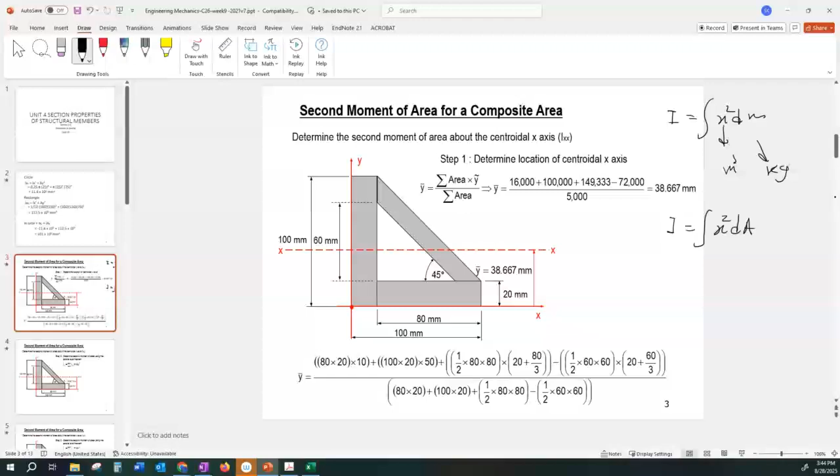So for this one, we can start breaking that into a number of shapes. For example, we do propose how to break it out in this problem. But before that, let's see how different scenarios can work for you.

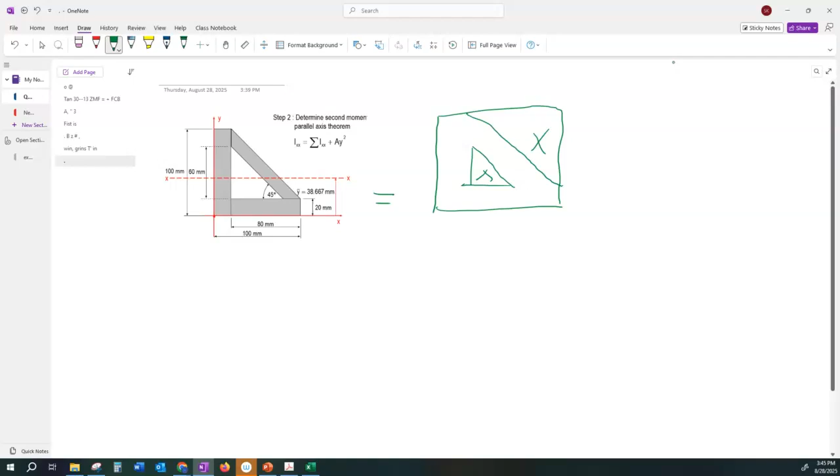So one scenario is if I make a big rectangle to start, this is equal to that one. Then from here, I draw a line and cut that part, and I end up with this one. Then let's subtract another triangle from it. That's one scenario, but the way we did it here is slightly different.

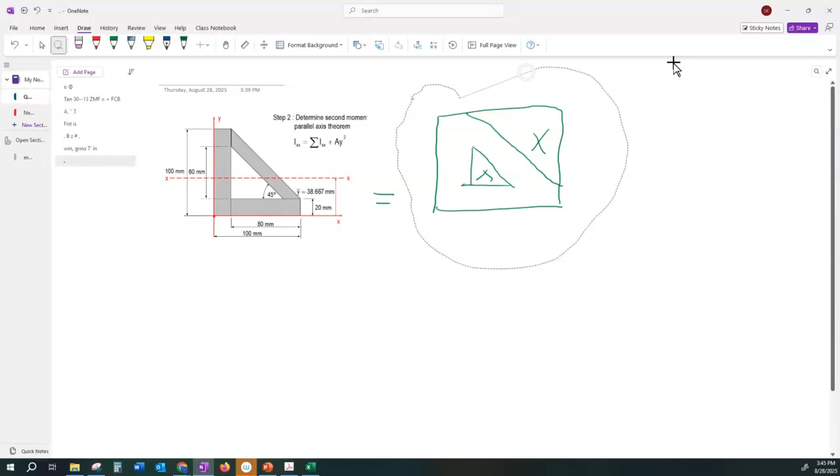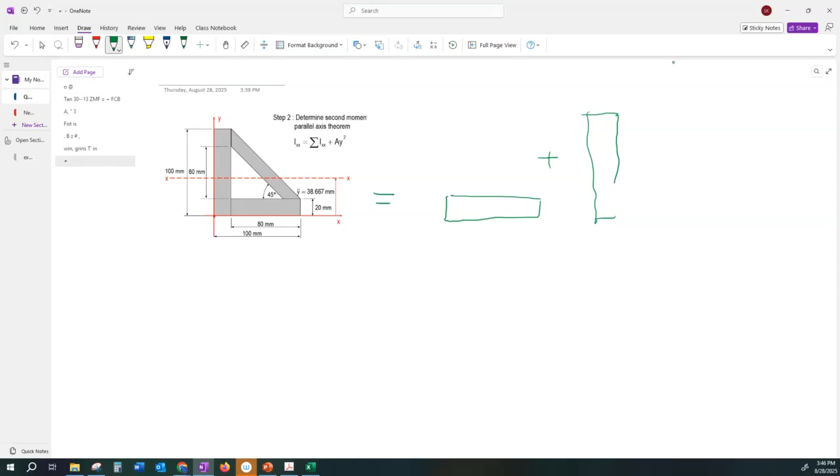So I'm not sure which one is smarter. With this problem, I don't have any preference. So here we start with a horizontal rectangle plus a vertical rectangle plus a big triangle, and then minus a little triangle.

All right, so this is not very perfect, and I'm not sure if we could perfect it more. But one thing I want you to notice is for the real beam, which is on the left-hand side, there is a reference, shown by the dotted line. The physical meaning of that dotted line is that if you start to bend the beam about that line, the upper and lower portions behave differently.

Anything above would be in tension, the bottom compression, or vice versa. Therefore, this is your reference, and that reference is the first thing you calculate. We call it Y bar. And then we want to bring the right-hand side, everything, these are primitive shapes.

Just a question: is it okay if I bring the standard value from the table, from the formula sheet, and add them together? For example, for this one, that is 1/12 B H cubed, that's what I get from the table. Can I just use it? I mean, I can, but I have to pay a penalty, right?

The penalty is with respect to this datum. This is my datum, here, that's where the centroid is. So if you are bending this one, you would have assumed that it's going to bend with the reference over there, but in reality the reference is here. So how much difference is here?

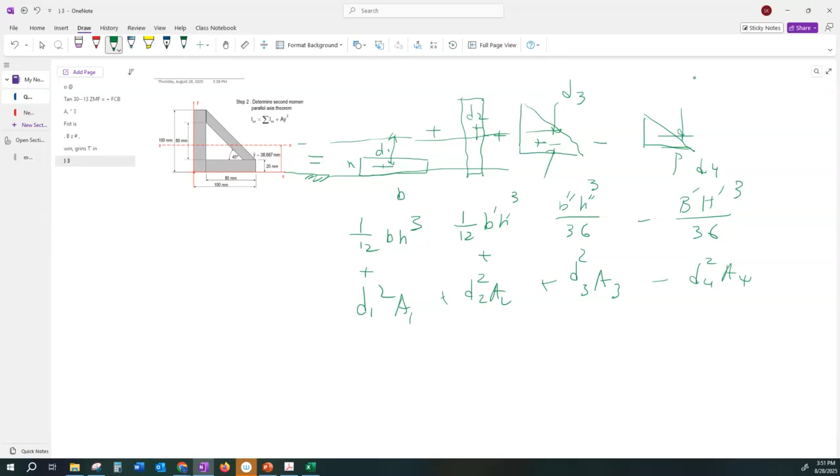Yes, so this is how we do it, but what is the first step here? The first step, when you are given the composite shape, is to find the reference, that dotted line. So how do we do that? This is also suitable for tabular method, because what you do is you say y bar is equal to...

a1 y bar 1 plus a2 y bar 2 plus a3 y bar 3, and then take a note here, I don't add a plus, I'm adding minus a4 y bar 4. And in the denominator, you put a1 plus a2 plus a3 minus a4. So don't be, this is not a universal formula. You have to take into account the plus minus sign.

Okay, so that is the big picture. Now we go to the number crunching for that problem. And once we did that, anything else we do, even that is very suitable for what we call tabular method. What is tabular method? You write formulas in Excel in a table, and then underneath the table you easily can sum the number. If you have to multiply terms and add them together, it's very flexible for that kind of thing, and that's what we will be doing next.

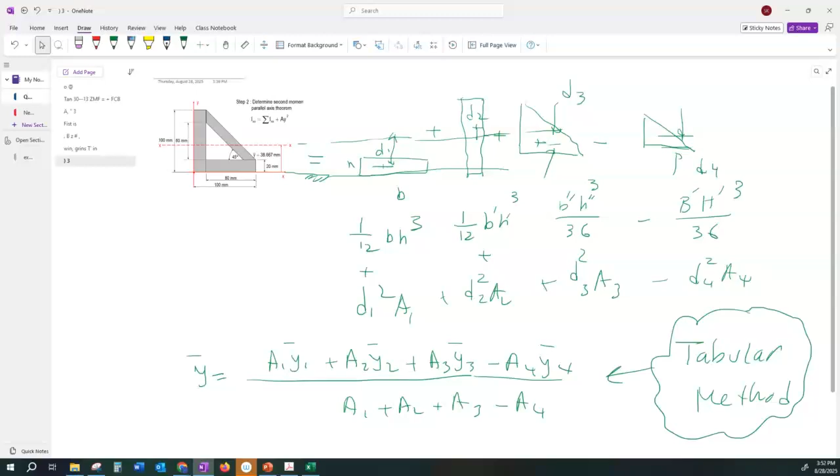So let's have a fast forward of how these things are being done. First of all, that formula is not correct. So here you should have a parenthesis. The sigma applies to everything. And here you put a bar. That bar means what you get from the table.

And that is, well, here they call this y squared, they call this d squared. They're the same thing. So this, you could write this as summation of I bar, this is from the table, or standard I, plus d squared a, I from 1 to n, however many shapes you have. And that summation could be sum, could be subtraction.

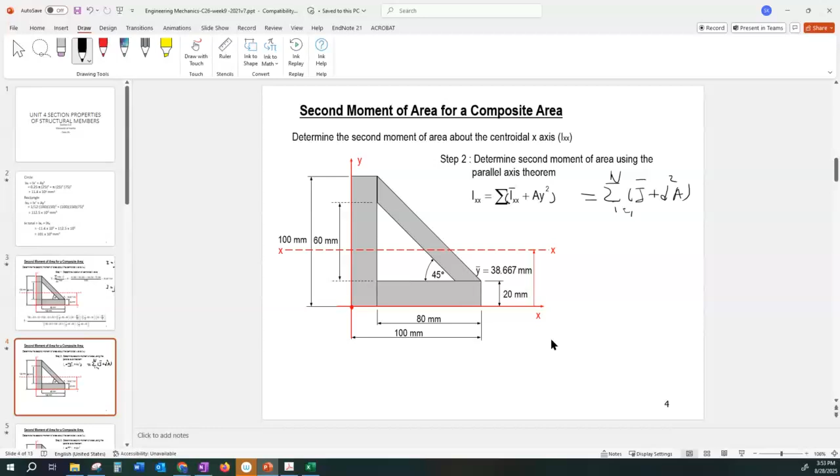All right, so let's get this one started. First shape. All right, we found the reference to be 38. Anyone has a problem how to find it? That was the formula I gave you. If you put the numbers in it based on the division, this is shape number 1, this is shape number 2, shape number 3, and shape number 4.

So 3 is here, 4 is here. Three is just a bigger triangle. 3 is the bigger triangle, and 4 is a little triangle. So basically, if you were to fill in where 4 is, that's one triangle. That's 3, it's one giant triangle. Basically with a whole bunch of the rows. 3 is the whole structure. Correct, that's the external part. Yeah, okay. All right.

Now, let's do this once for the yellow, which is number 1. Anyone can tell me where is the centroid of yellow? The centroid of yellow with respect to the bottom or datum. This is the datum, right? So the centroid of that is here, isn't it? That's 10. So if you want D1, that is D1, isn't it? So D1 is equal to what?

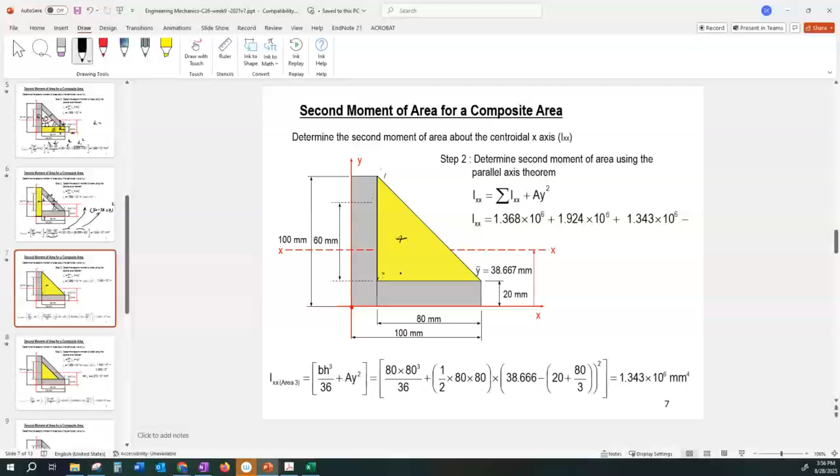Now take this, this is the third shape. And with the third shape, careful where the centroid is. The centroid is 1/3 of the base. So if this one is 80, the centroid is located at 80 by... I just exaggerate to make this readable, so that is 80 divided by 3. So if the total is 80, this is 80 by 3.

And then you have to add another 20 to it, so 20 added to 80 by 3. That is how far you are from the datum. From the baseline. This is the baseline, you have to measure. Y bar was measured from the baseline, so your centroid should also be measured from the baseline. And then that is the gap you are looking for. That is D3, this is the D3.

And that should be multiplied by... well, no, not D3. D3 is here, D3 is this one. And that is the area of the triangle. That's a standard value. For triangle, the formula is not BH by 12, that's BH cubed by 36.

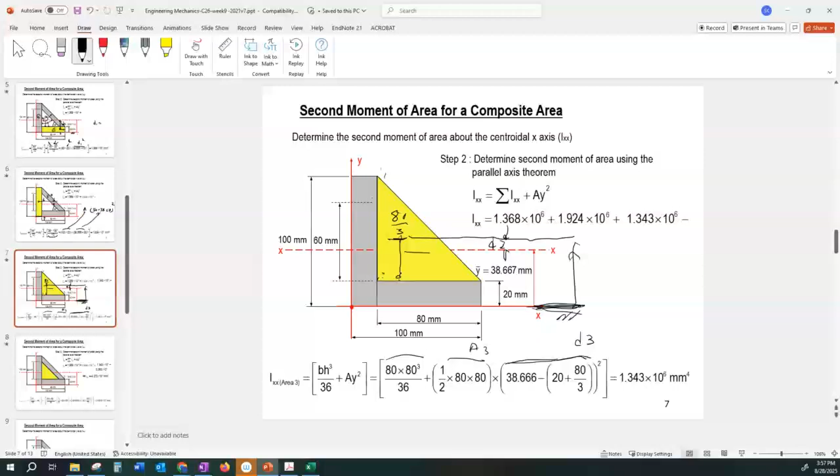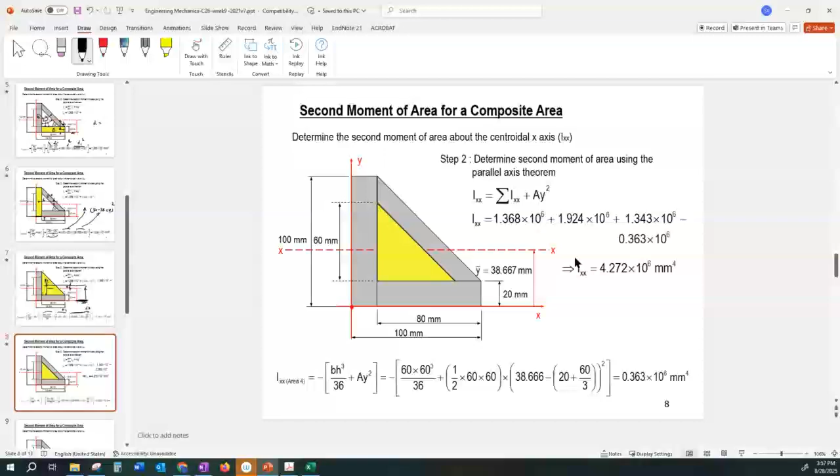All right, now eventually you do that for the little triangle. But little triangle, keep in mind, it should be subtracted from the previous values. And eventually you have all these things calculated all together.

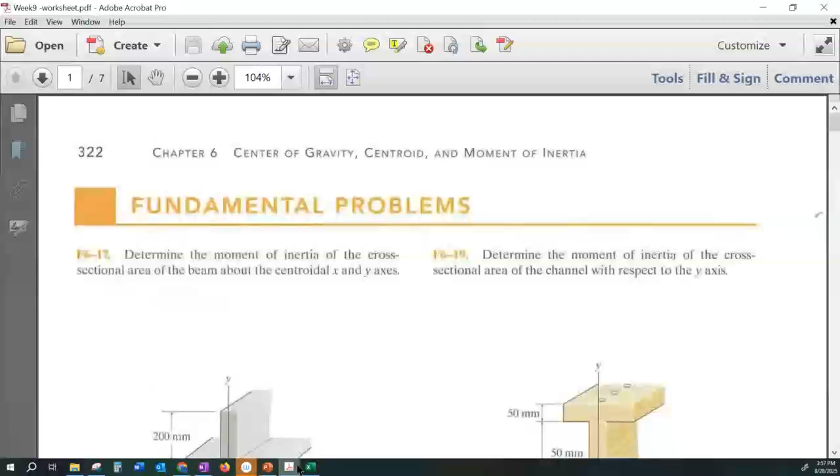Now let's go to page 322. And the question we have is number 18. Let's see what number 18 is. This one.

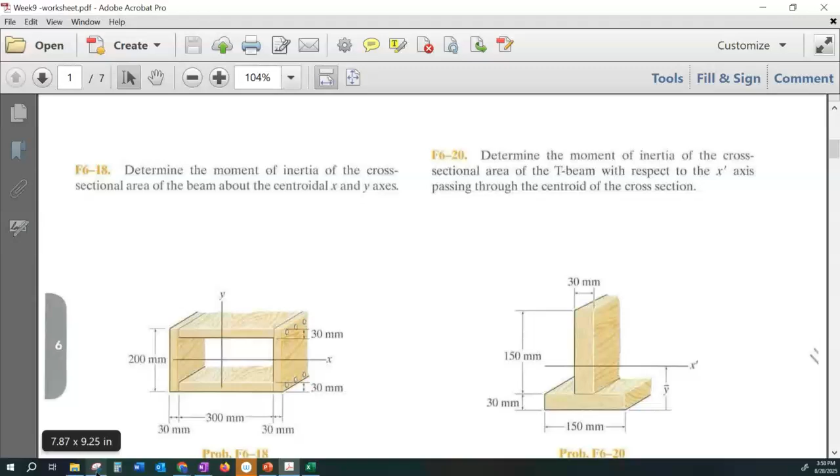2 minutes. Who can propose the smartest decomposition? Would it just be one big box minus one small box? Why that is smart? I mean, everyone listened to what Taha said. Look, we could have done it differently. Let me do that in both ways. You see the difference, okay?

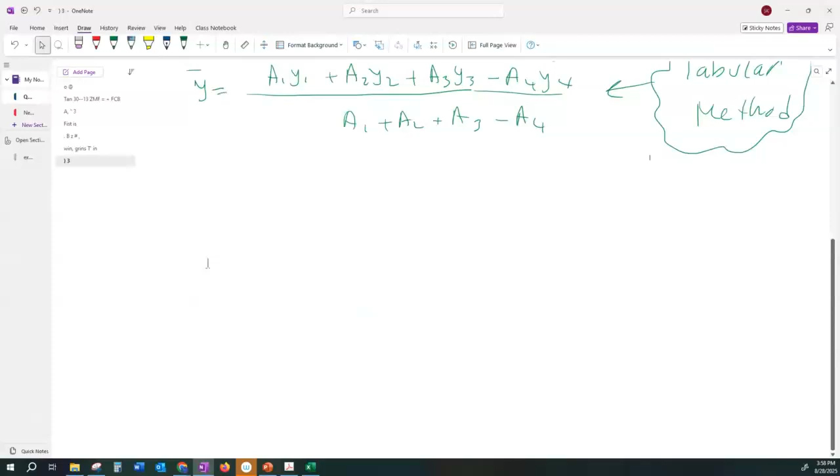So what he is saying is he is proposing this shape, this cross section, is equal to that rectangle minus this rectangle. Why is this so smart? Because the centroid of this one is right in the middle, isn't it? If you extend, this one has the same centroid, this one has the same centroid, so you don't have to pay any penalty for it.

I mean, someone could do 2 times a vertical wall plus 2 times a horizontal line. Okay, but at least for this one, you have to go and find an offset, you have to calculate the penalty. But eventually, you get the same number. This is just a matter of convenience, the matter of don't do something which is not needed.

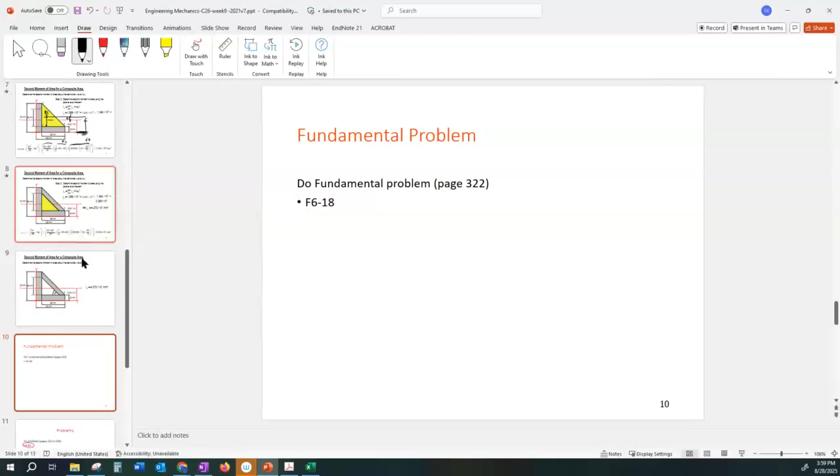Let's go to page 322. Okay, here we want to calculate I for here. And this is a 2-part question. First, it wants you to find I with respect to the x-axis. The other one asks you to apply one with I with respect to y-axis.

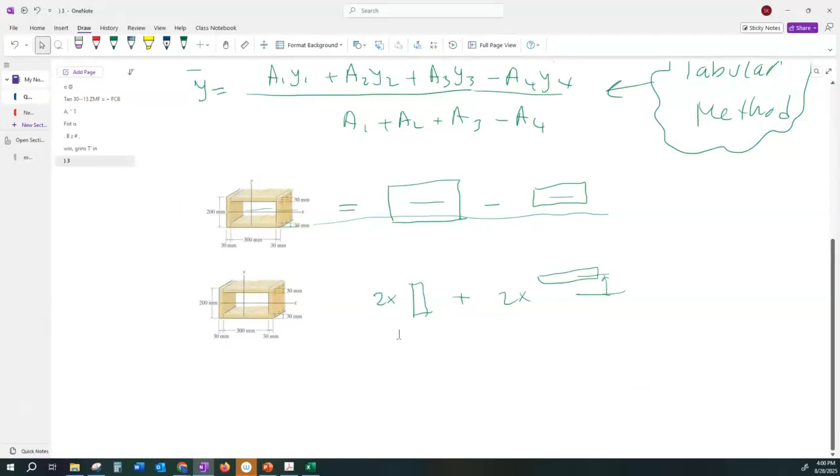So what is the difference? The difference is with this very same beam, if I apply my load like so, the bending takes place like so, right? So it is about that axis. But very same beam, in this case, load is Py, your I is Ixx. But if I apply P in that direction, this is Px, then you have to calculate Iyy.

So load normal to the reference plane of the bending, all right, just memorize it. And in some problem, tricky problem, they just flip the shape, and students are used to taking the horizontal line as the x-axis, but then for that they have to use I for the vertical axis. If that makes sense to you.

So is I the centroid of the whole shape? I is not the centroid of the shape. I is a geometrical property which is directly proportional to the performance. The larger the I, the better performance. Mathematically, I...

Iyy, that is I with respect to the y-axis, that is x squared dA, but Ixx, that is y squared dA. So that's mathematical, kind of difficult to interpret, but the interpretation is: if you throw that dA farther from the neutral plane, the larger the number. This is like when we had an I-beam, we try to stretch that, to make the area farther from the neutral plane.

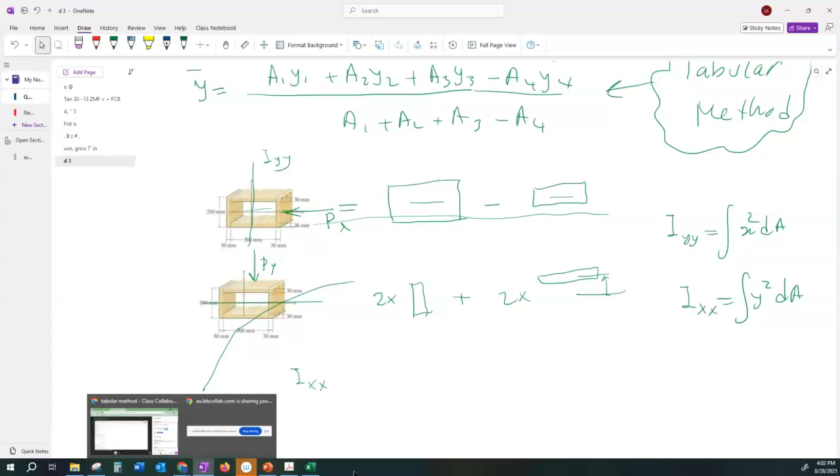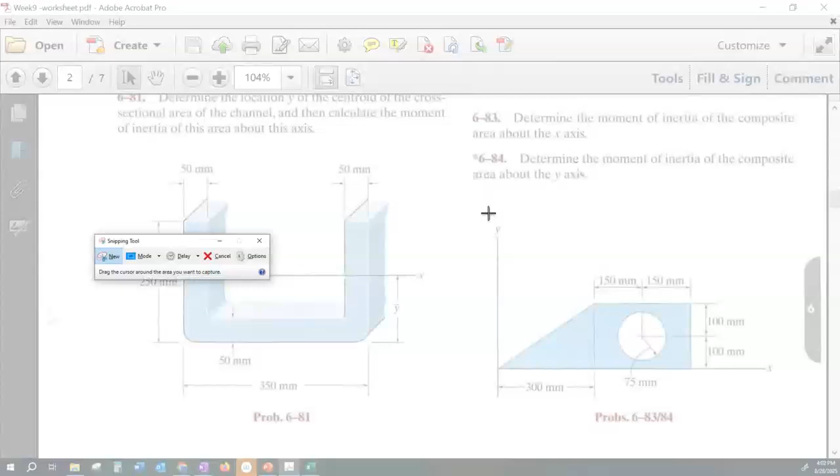Let's do something which has some tough number crunching, something like this one. Okay, for the first part, you want Ixx. Let's try together. And with that, I think we could start the tabular method with Excel.

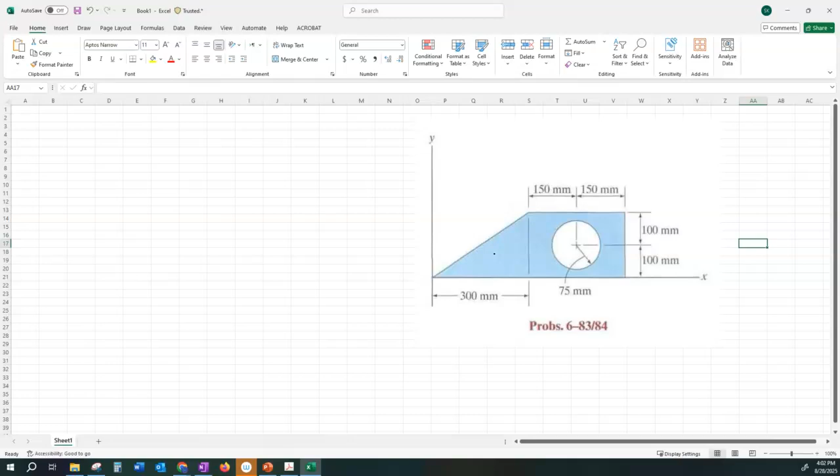All right, so let's call this one number 1. So this is number 1. That is number 2, the entire box. And this is number 3.

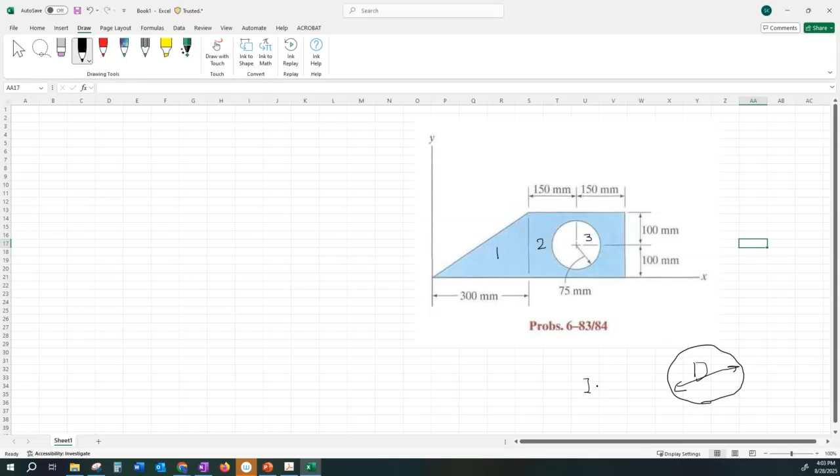Now, let me bring the formula you need and put the formulas next to it. For a circle, standard I is pi d to the power of 4 divided by 64.

For a triangle, this is B, this is H. So centroid is H by 3, and I is equal to BH cubed by 36. So these are from the formula book.

Now, how does the tabular method come into it? Let's calculate y bar first. What did you say was the formula to get the centroid of a triangle? You get them from the table.

So now let me just make this one number 1, number 2, number 3. And this one I call y bar i. This one I call Ai. And that one I call the product of yi, Ai. And to calculate y bar, that is all I need.

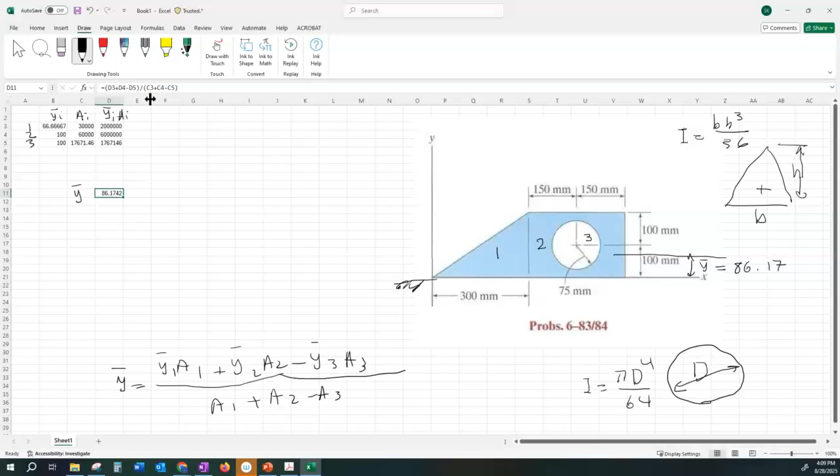All right, now if you want to calculate I, a few more things you need. First of all, I have to add a new column here. That column, I call this - let's make this column a bit wider. All right, so I put a standard I, call this I bar.

This column, we call I bar, that means I bar i. This is what you get from a standard table. So remind me, what is that of the triangle?

Let's calculate that together. This is equal to BH cubed divided by 36... wait, 3? That is 300 - we are talking about shape 1. 300 times 200, times 200 cubed, divided by 2, correct?

Base times height, area of the triangle... Oh no, that is cubed. Yeah, you're right, cubed. Yeah, cubed on 36. Divided by 36. I think I have to put this in a parenthesis, otherwise it might be misinterpreted. 36, right?

So that is I for the first shape. So for the second shape, that is simple. That is equal to parenthesis BH3 - that is 300 multiplied by 200 cubed - parenthesis closed, divided by 12.

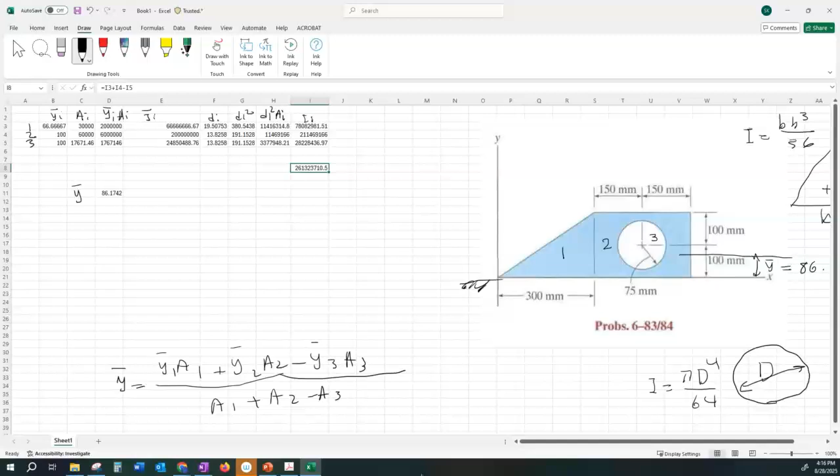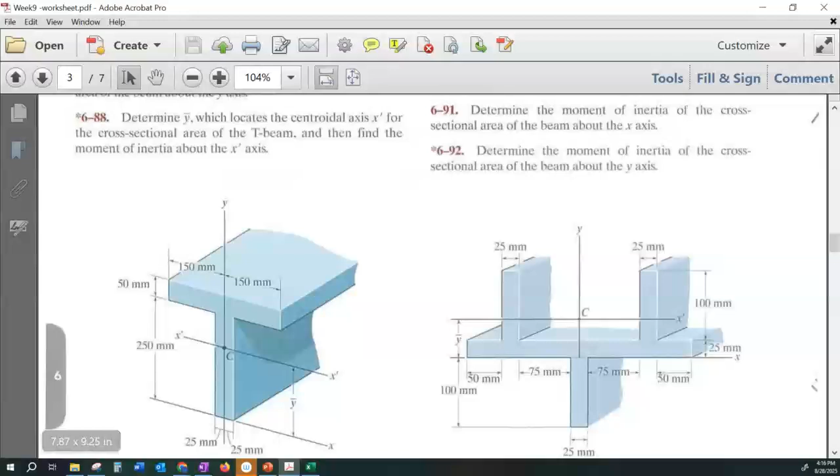All right, so now let's go to another problem. That is very similar. This is a practical shape, a T section. Actually, in the lab, we have also this kind of section. Let's grab this one.

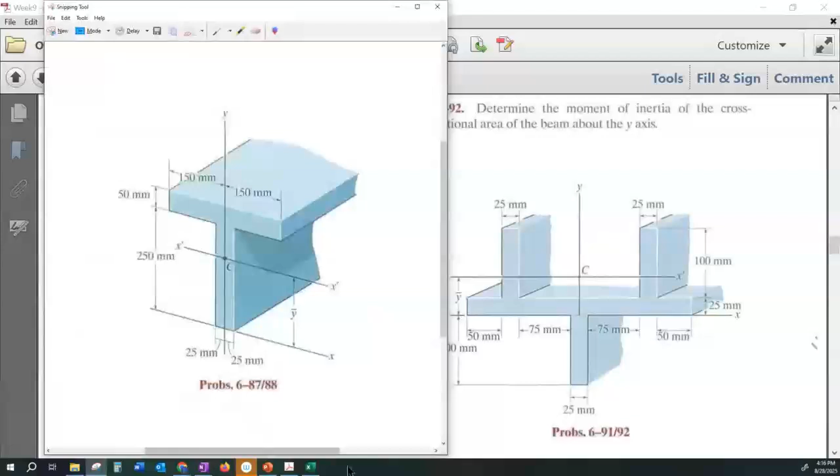All right, first thing is to label the shapes. So I'm labeling this one as 1, labeling this one as 2. Only 2 shapes. All right, and first thing is to calculate y bar. So the y bar is simply y bar 1 times a1, plus y bar 2 times a2, divided by a1 plus a2.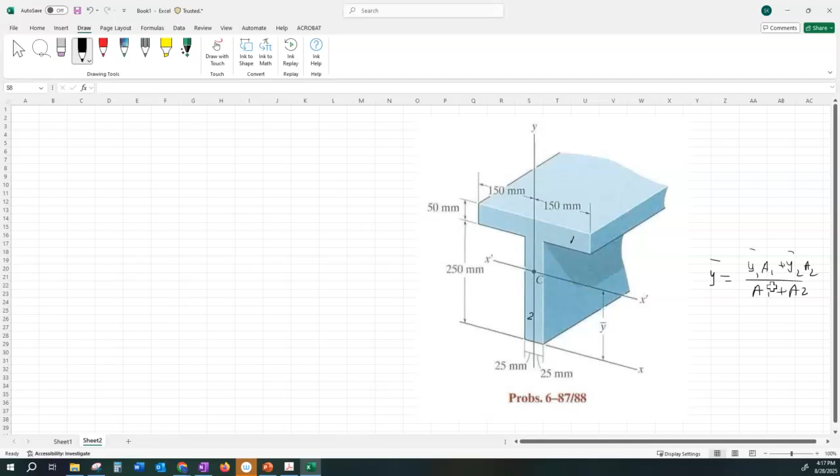So let's start this here. You only have 2 shapes, 1 and 2. So here that is AI. This one is y bar I. That is the products of AI, YI.

Okay, who can help me with A1? A1 is 50 times 300. Just watch me, I don't make a mistake.

A2, oops, this should go here. And second, that is area is equal to 50 multiplied by 250.

And then y bar 1. Who can help me with y bar 1? That is equal to 250, I'm measuring that from the bottom, plus half of the 50, which is 25. Correct? Yep.

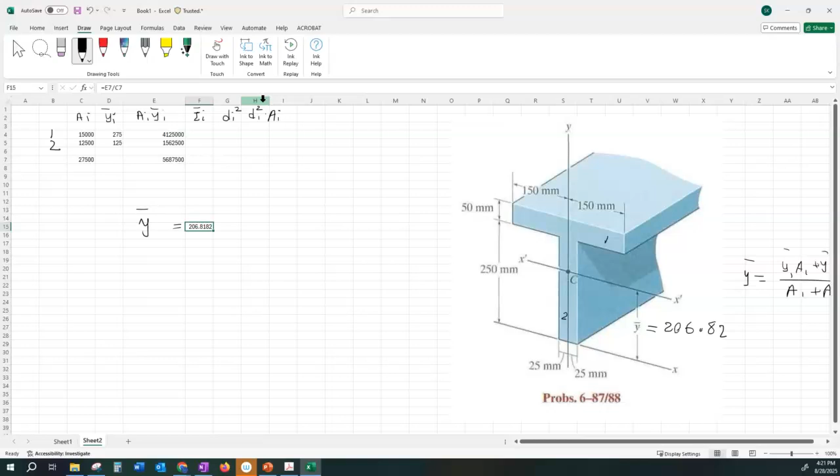All right, so for the first shape, that is equal to 1/12 multiplied by BH cubed. So that is 300 multiplied by 50 cubed. That is I for the first one.

For the second one, that is equal to 1/12 multiplied by 50 multiplied by 250 cubed.

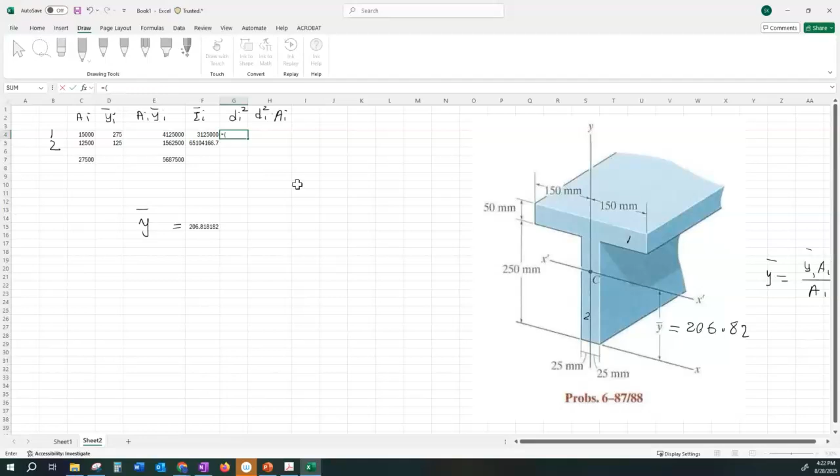All right, and what about di squared? That is equal to the parenthesis, this minus, for the first shape, what is the centroid of the first shape? That's 250 plus 25, that's 275. And that has to be squared. The outcome should be a squared number.

And same thing with the second shape. That is equal to 125 minus that. We don't care if that's negative because this is going to be squared and you get the positive number. Oh, I made a mistake, yeah, that should be times.

And finally, you want the product that is equal to this multiplied by AI. Approved. And final column, that is the adjusted I value. We call this I. This is not I bar I.

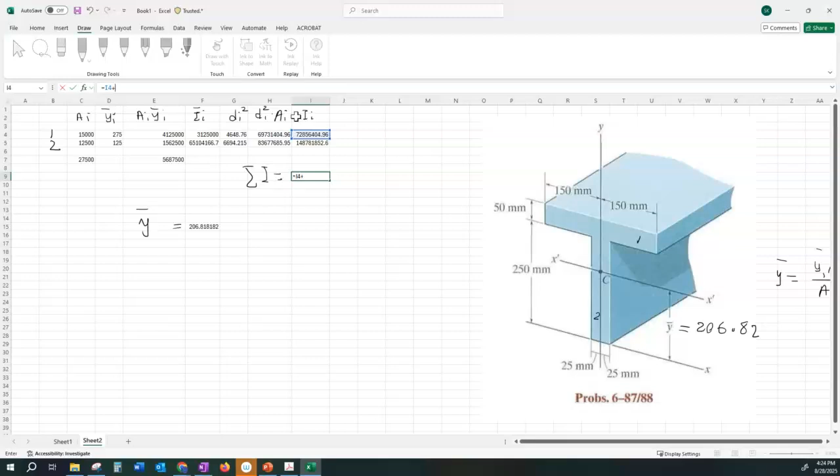And finally, the total I, that is sum of these two totals. This is equal to that plus this. All right, we got the total.

All right, the last practice we have for today, that would have been something very cumbersome. If you want to do this manually, you find out how cumbersome that is.

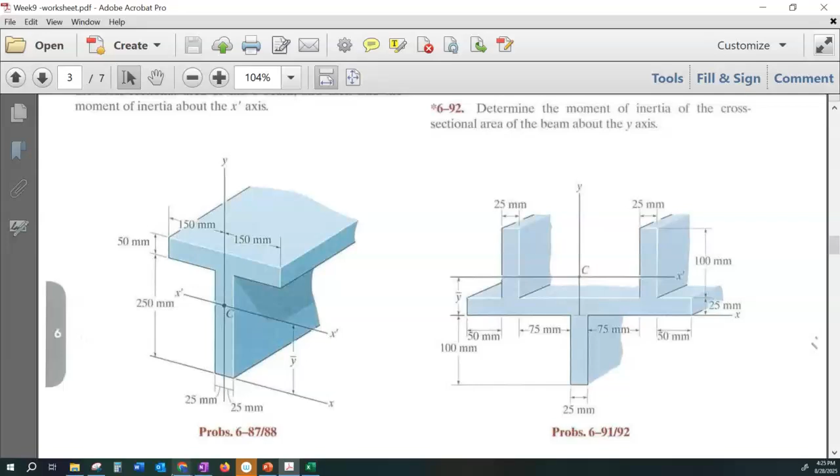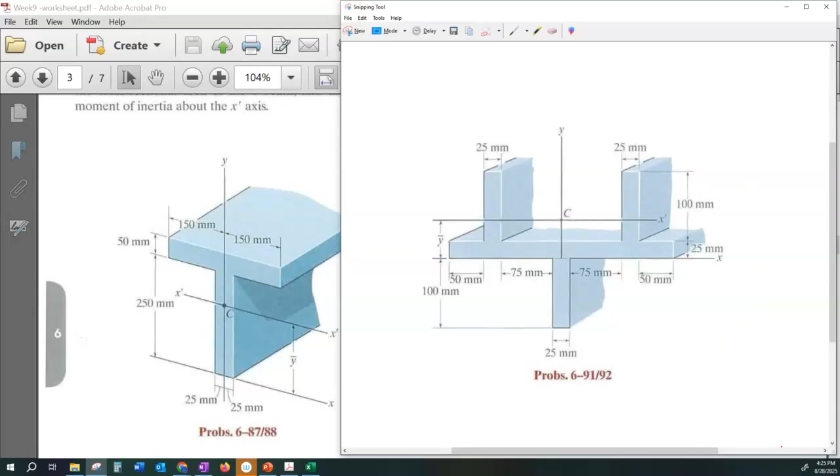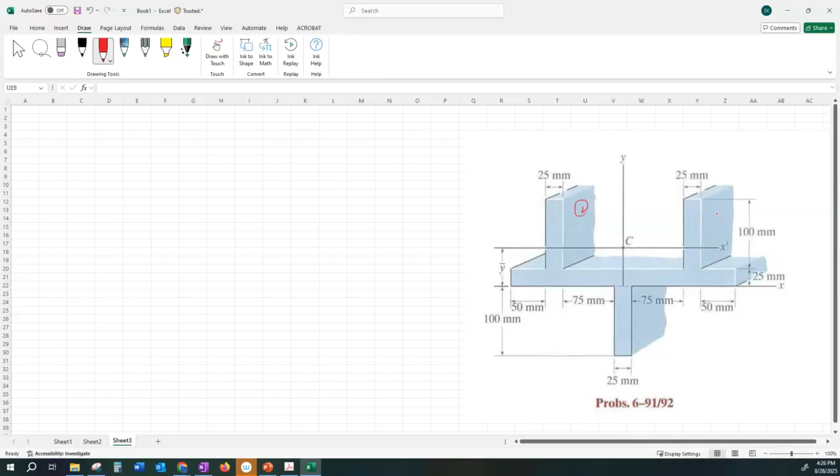So this time, let's first of all, you have to label them. This is number 1. This is number 2. Oh, 1 is repeating twice, so let's make both of them number 1. That is number 2, and this is number 3. Does that make sense? Is the bottom one not the exact same as... never mind. Well, geometrically, yes, but with respect to the distance from the center, they are not the same.

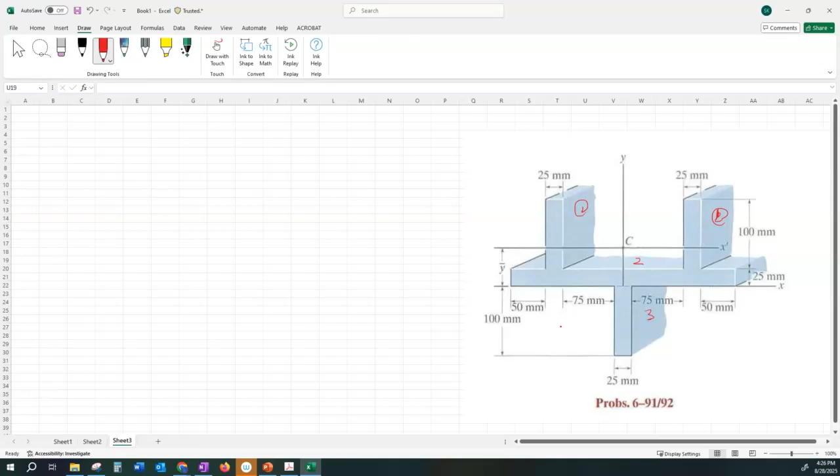But you could use the same area. The area would be the same. Now, the starting point is you have to find y bar. So I write the formula for y bar somewhere in the corner. Let's see what the y bar is. Y bar is equal to 2 times y bar 1 times A1 plus y bar 2 A2 plus y bar 3 A3. And then divided by 2 times A1 plus A2 plus A3.

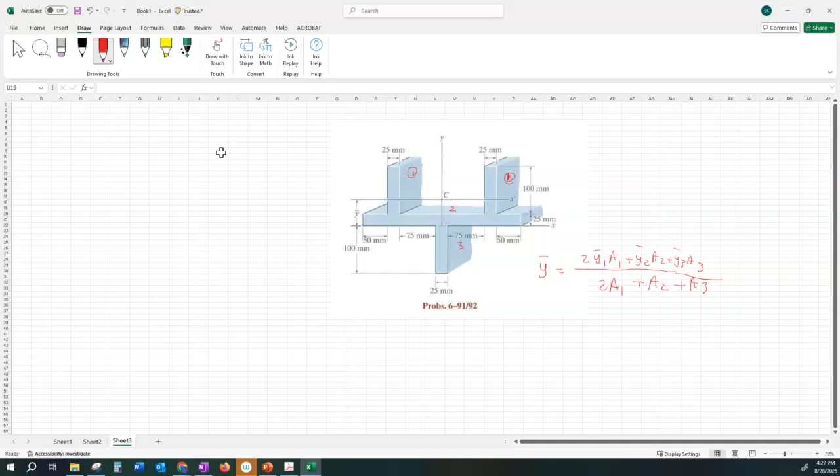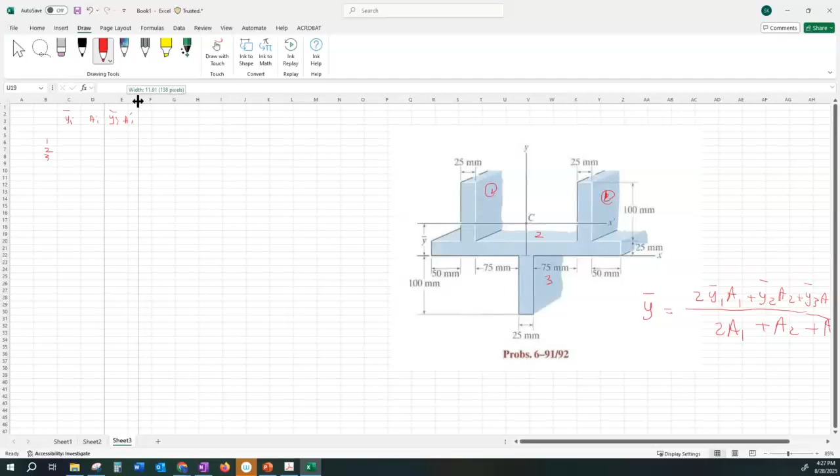Correct? Now let's calculate the same thing here. You start with 1, 2, 3, and the first column could be your y bar 1, and the second y bar I. The second one is AI, and that is the product of y bar I AI. For the first one, if I take that line as my baseline or datum, for the first shape, let's find out what y bar is. 100 plus 25 plus 50, that's 75. 175, right? 175.

What is the y bar for the second shape? That is 112.5. And for the third one is simple, simply 50.

And what is the area for the first one? Okay, area, I put a 2 in front of it to remind ourselves this is repeating twice. That is 2 times multiplied by 25 multiplied by 100. That's the total area. And with the second one, you have 325. The total is 325. So that is equal to 325 multiplied by 25. And for the third one, that is equal to 25 times 100.

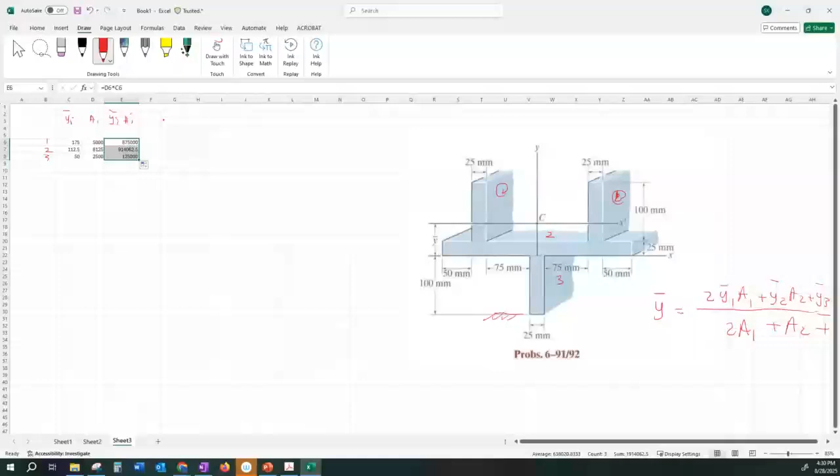And next column, you just simply multiply the previous 2 calculations. This multiplied by previous one. And dragging this handle. Now all you have to do to calculate y bar is sum of these values divided by sum of these values here.

And that is 122.5. Does that make sense? Not much. I would have expected this to be, yeah, maybe a little bit high. But I think it's probably still... Let's see where we made the mistake.

When we receive any questions, different shapes will have different weights. Wait, weight doesn't come into this - this is only about the section property. Centroid, second moment of area - weight doesn't come into it.

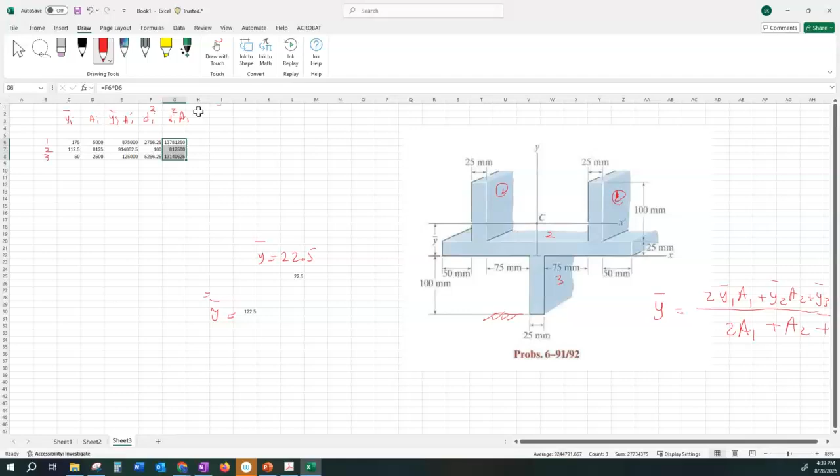And the next column is the standard I. So for the first shape, the standard I is equal to 2/12, because there are two of them, multiplied by BH cubed, 25 multiplied by 100 cubed.

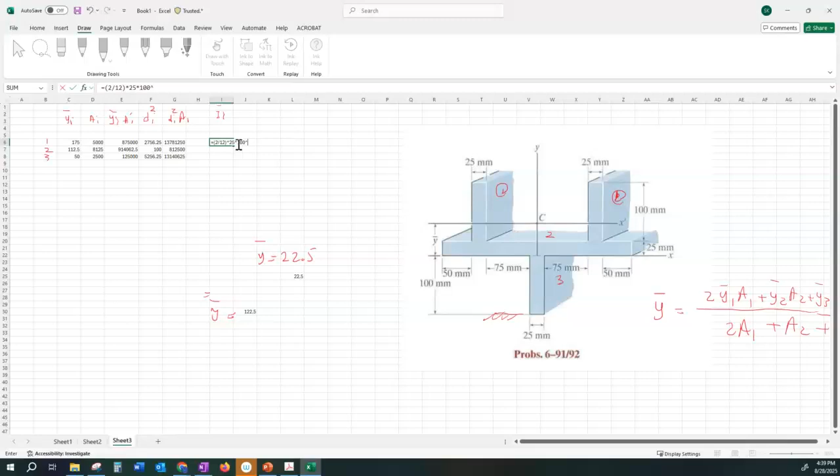And with the next one, you have equal to 1/12 multiplied by 325 multiplied by 25 cubed.

And for the third shape, that is equal to 1/12 multiplied by 25 times 100 cubed.

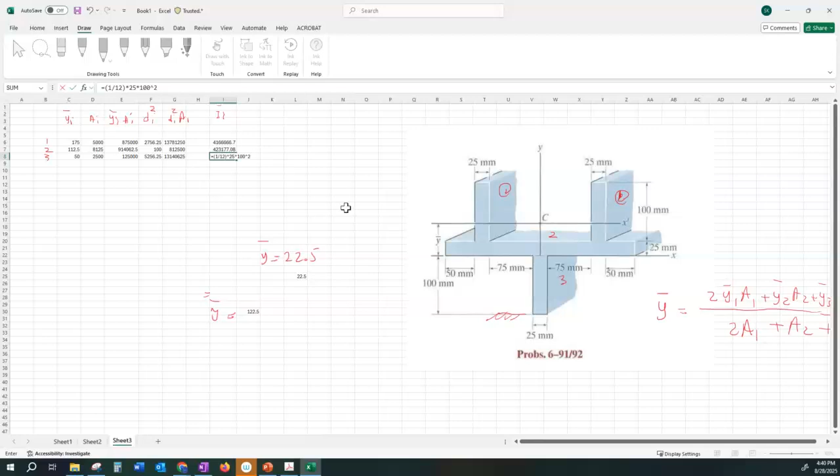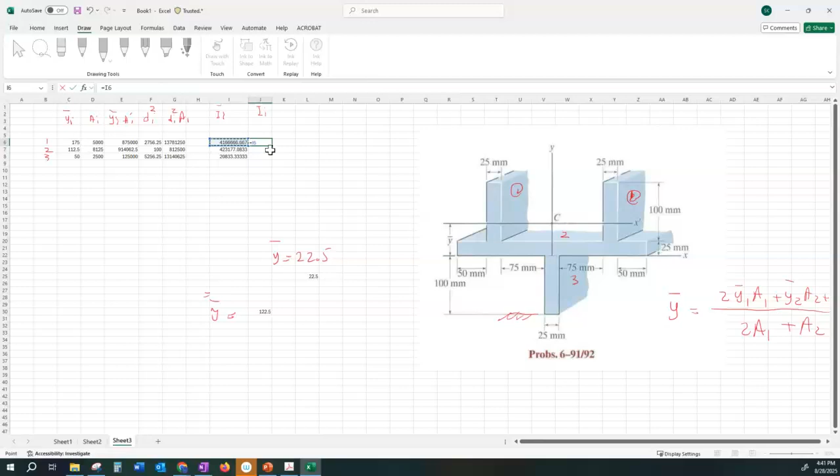And finally, you have the adjusted I - so this is the adjusted I, which is the standard I plus the penalty, and the penalty is here. And then that is calculated for three shapes.

And finally, the total I - that is equal to the sum of these three figures, these three scalars added together. That is the total I.

All right, you think that this is use of the computer? Yes, it is. But the very same thing would have been done more precisely, more quickly in SolidWorks. But the point is, SolidWorks is an expensive slave - not every master can afford to buy that slave. This is a humble thing everyone can access. All right, we went faster than expected because we were cheating using the computer, but that's quite perfect - I don't want to stop you from using that. All right, so you can do this.

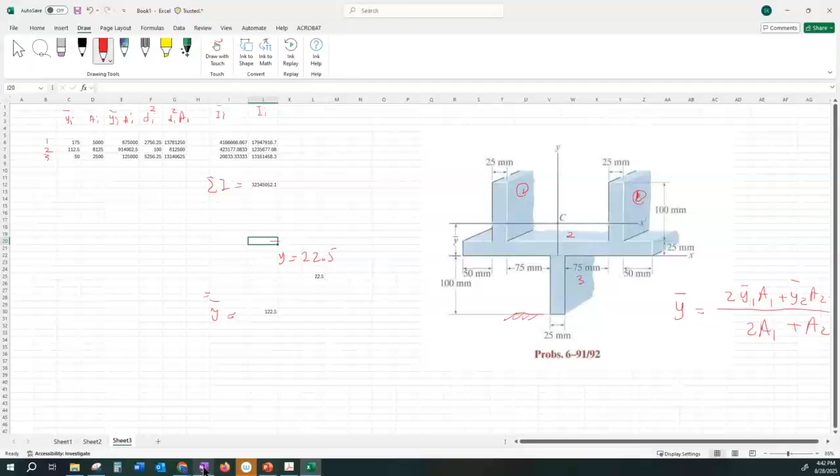In the remaining time, I want to give you a brief head start for next week's computer lab. So what do we expect in the next computer lab?

Once you apply the load, every point of the beam would have its own deflection. The symbol we use for deflection is lowercase v - that shouldn't be confused with uppercase V, which is for the shear force. Lowercase v is for the deflection.

Once you tabulate all these, you can pass a curve to it, and that curve will tell you exactly where the maximum deflection is. The maximum deflection should be near the middle, but not exactly at the middle, since it's eccentric.